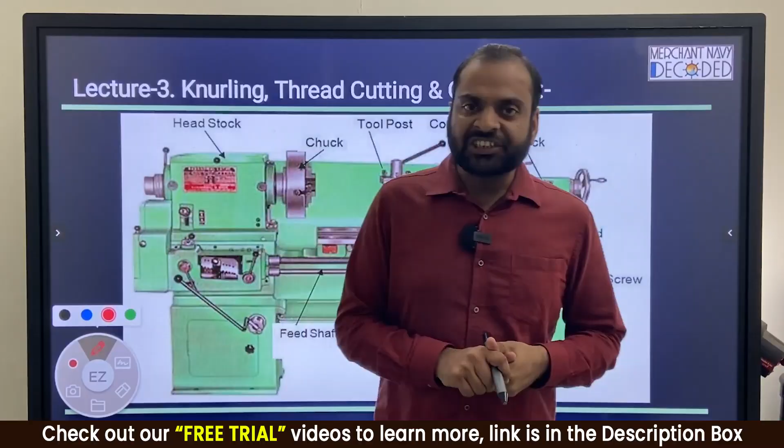Hello GP rating aspirants, welcome back to the next lecture. In this lecture we will discuss different operations like knurling operations, thread cutting operations and grooving operations.

I already taught you about this lathe machine. There are two movements of this tool post. First movement is longitudinal movement, that is parallel to the lathe, and second movement is cross movement with the help of this cross slide. First movement is longitudinal movement and second movement is cross movement. Clear? And this is your chuck.

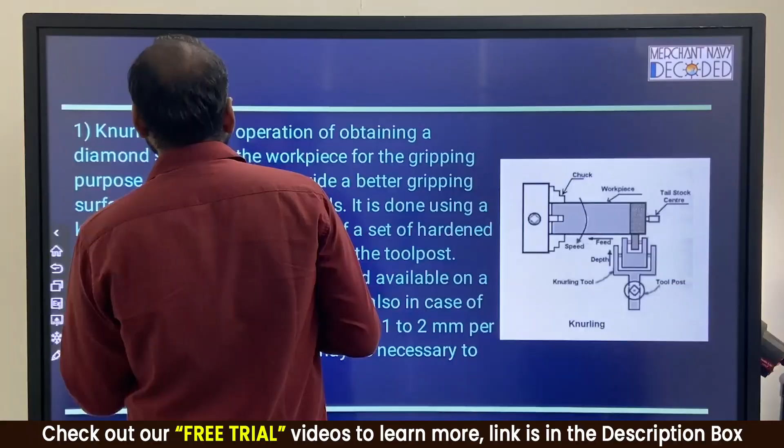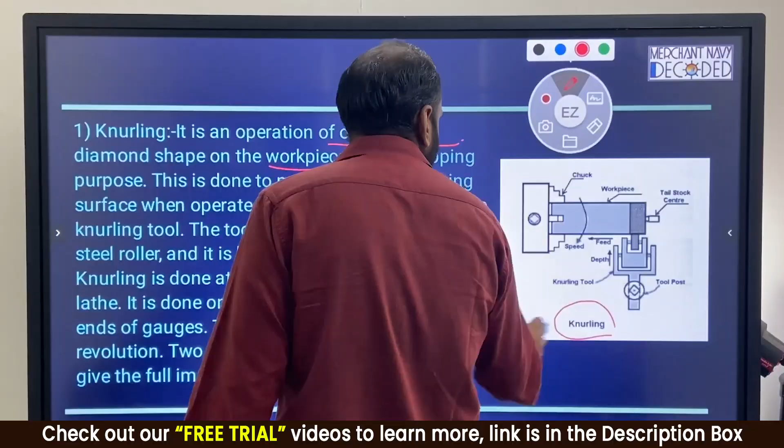Next, what is knurling operation? Knurling is an operation of obtaining a diamond shape on the workpiece. So this operation is nothing but knurling for the gripping purpose. This is done to provide a better gripping.

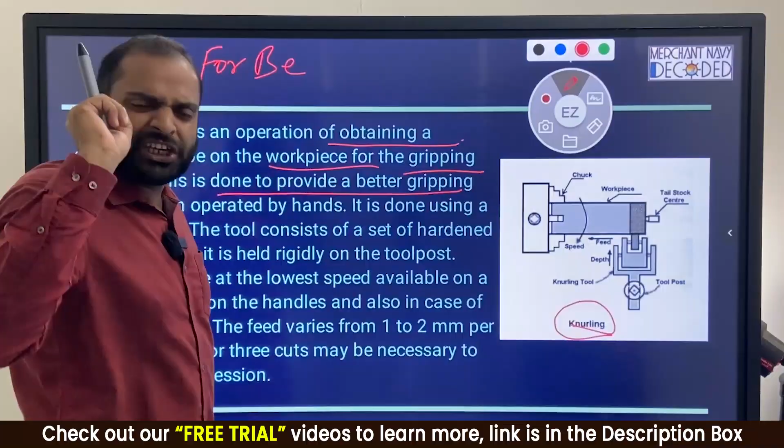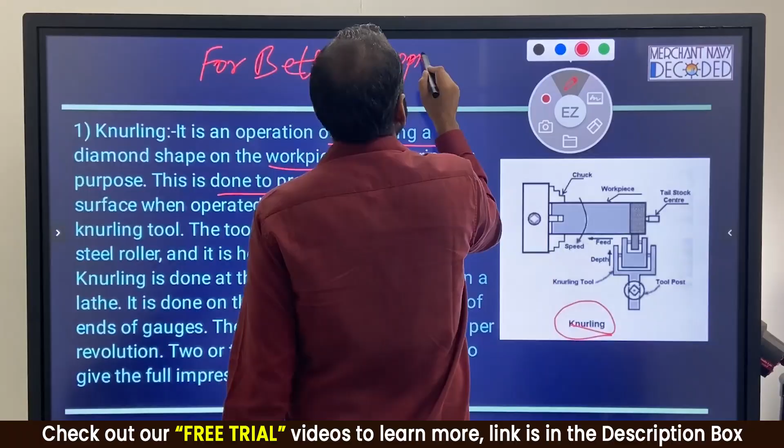This is an important MCQ question. For better gripping, please write it down, each and every point. The exam will definitely ask: for better gripping, which process is followed? Knurling process.

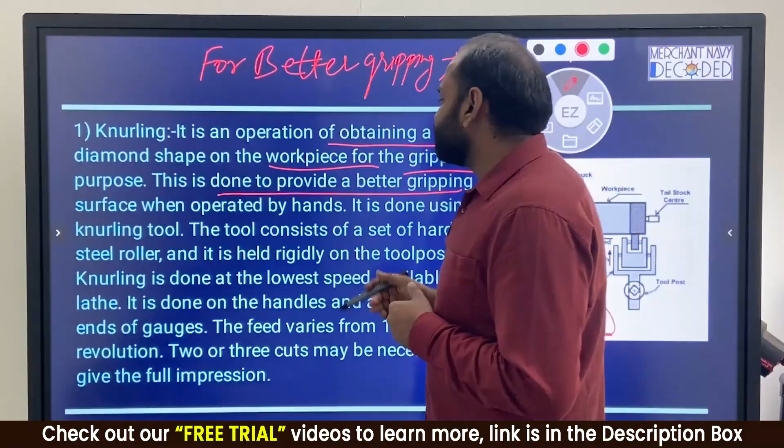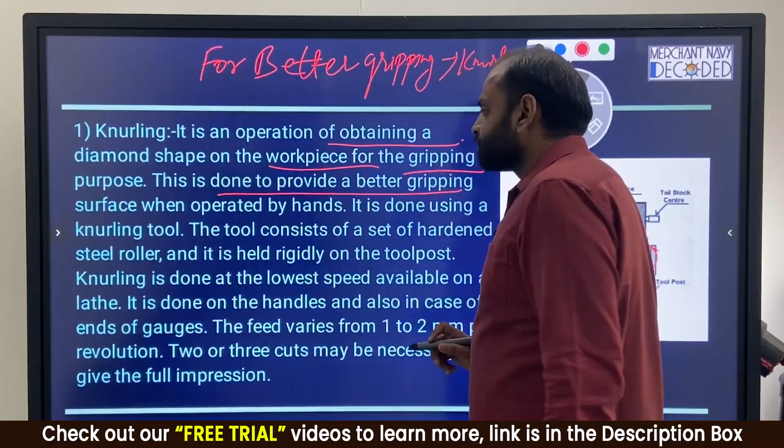So it is an operation of obtaining a diamond shape on the workpiece for the gripping purpose. This is done to provide a better gripping surface when operated by hands. It is done using a knurling tool. This is a knurling tool, a special tool.

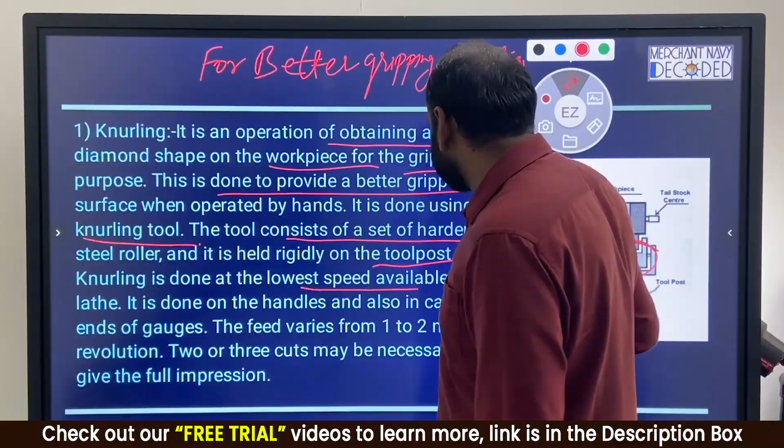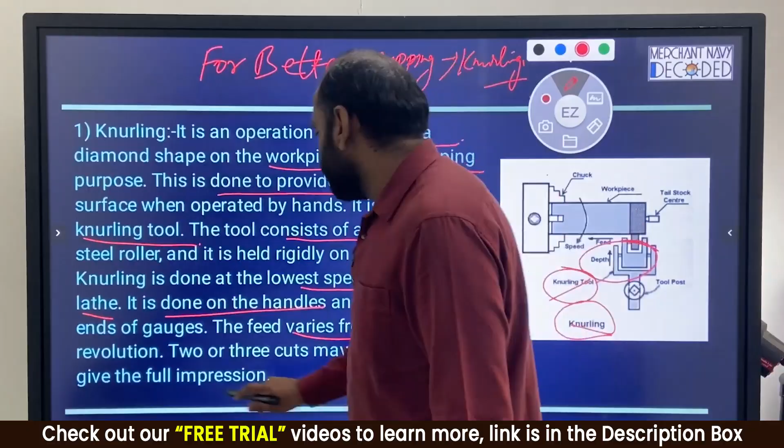The tool consists of a set of hardened steel rollers and it is held rigidly on the tool post. Knurling is done at the lowest speed available on a lathe. It is done on the handles and also in case of the ends of gauges. The feed varies from 1 to 2 mm per revolution. 2 or 3 cuts may be necessary to give the full impression.

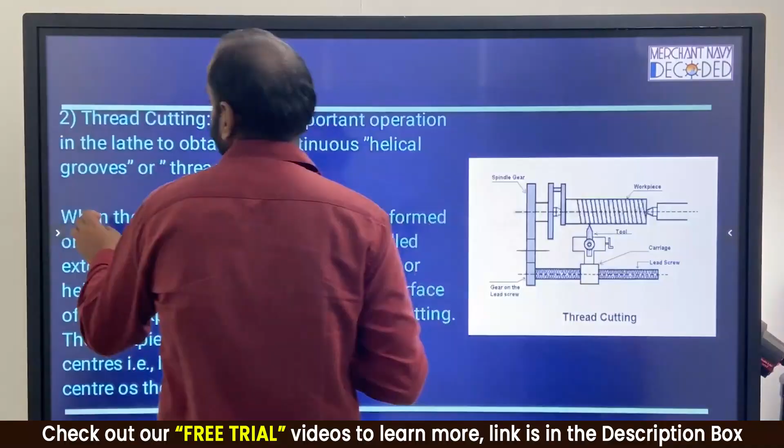So this is all about the knurling operation. Please remember the image well. Now, thread cutting - what is thread cutting?

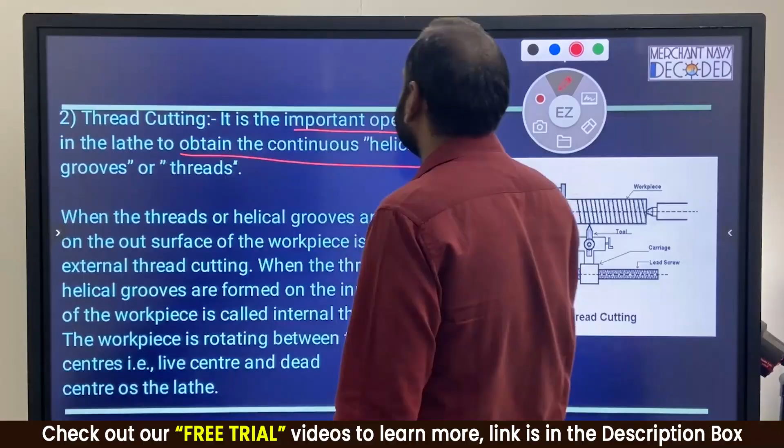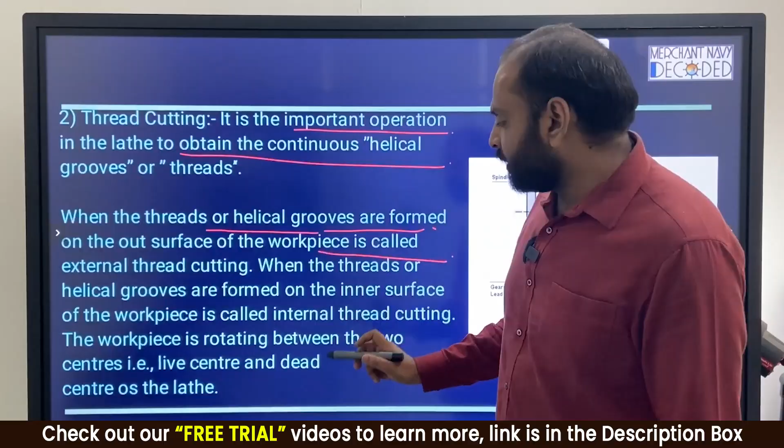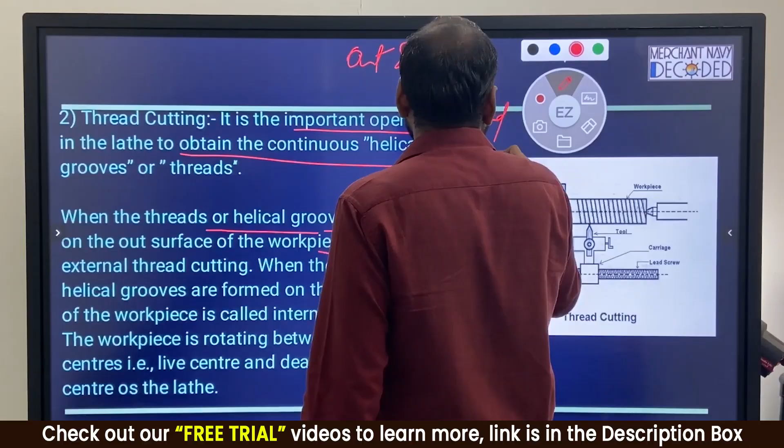This image refers to thread cutting. It is an important operation on lathe to obtain continuous helical grooves or threads. When the threads or helical grooves are formed on the outer surface of the workpiece, it's called external thread cutting. This is the outer surface.

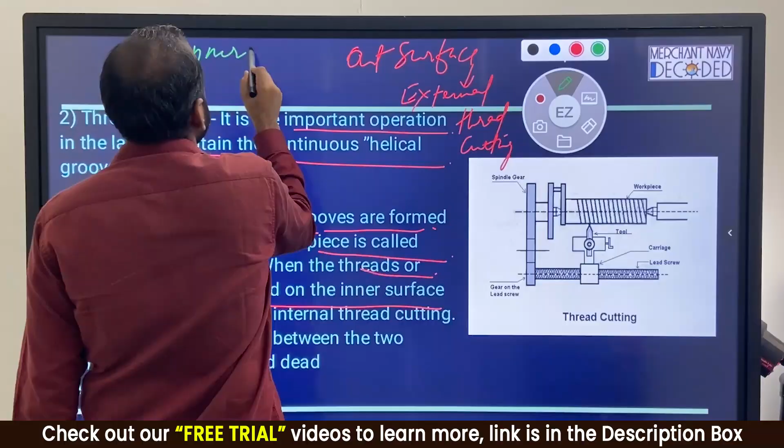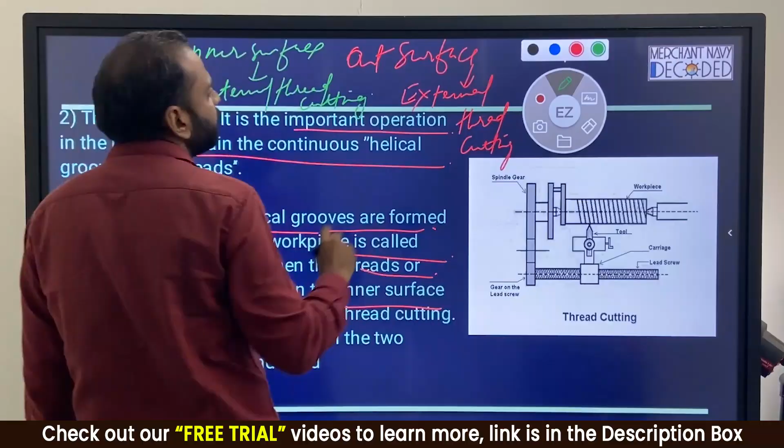When the threads or helical grooves are formed on the inner surface, it's called internal thread cutting. So the first one is external thread cutting and the second one is internal thread cutting. This type of operation is possible through thread cutting operations.

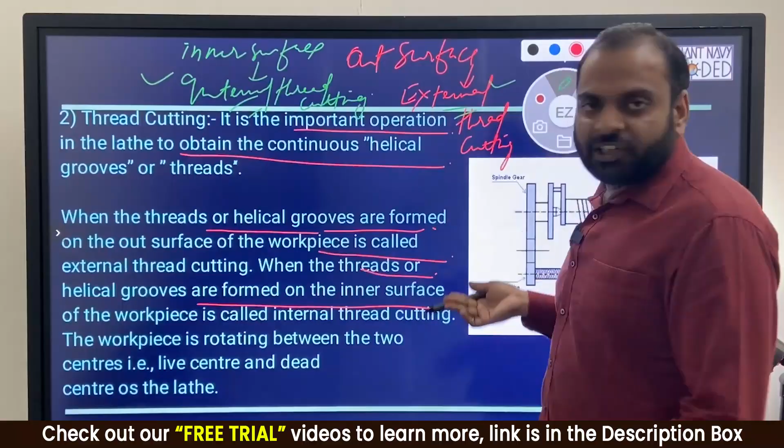The workpiece is rotating between the two centers, that is the live center and dead center. I already taught you what is the live center, which is rotating in nature, and the dead center which is in the tailstock. So this is all about thread cutting.

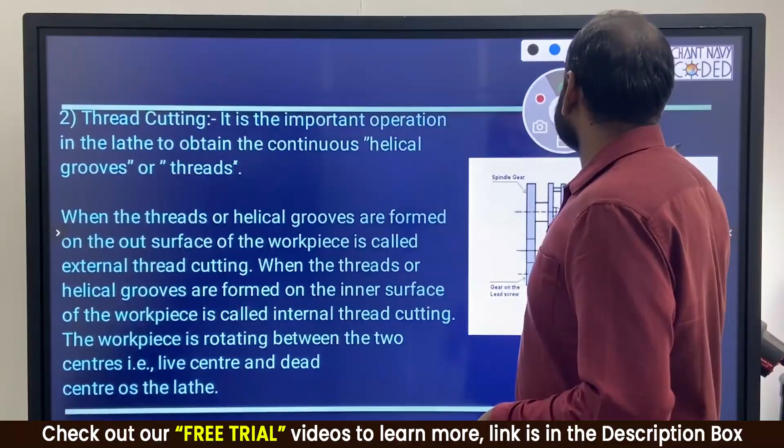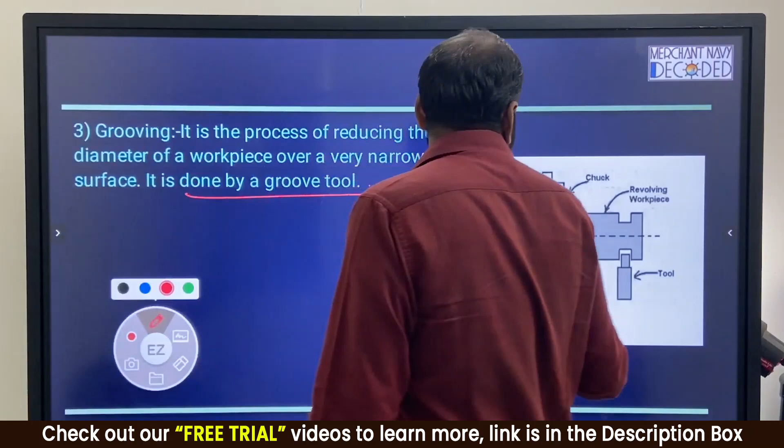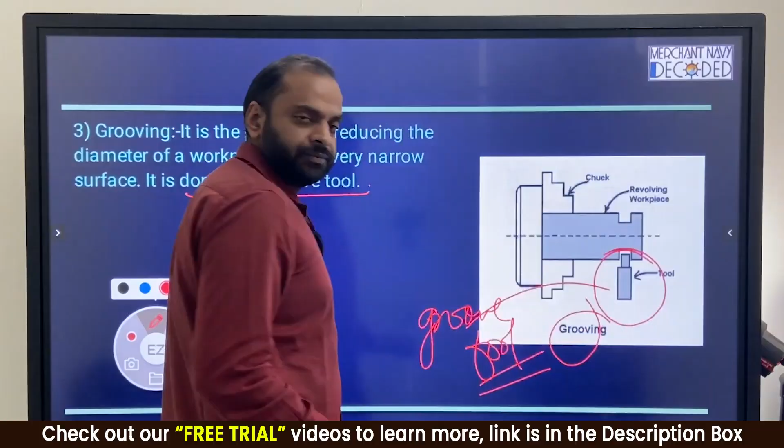Now what is grooving? It is the process of reducing the diameter of the workpiece over a very narrow surface. It is done by a groove tool. So this is a groove, and this is the groove tool. This operation is nothing but the grooving operation.

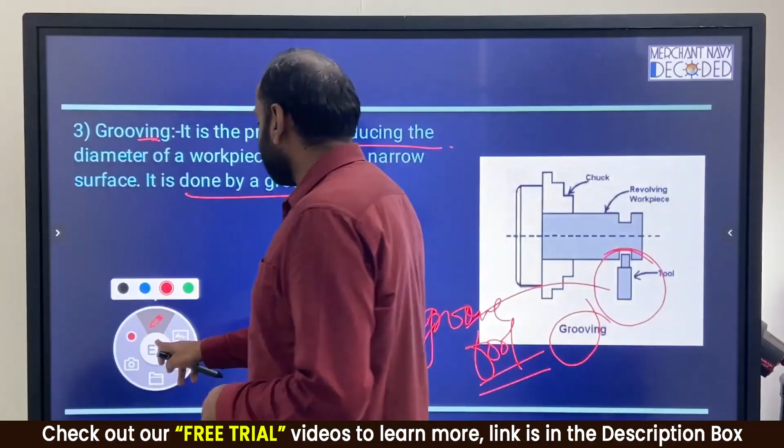It is the process of reducing the diameter of the workpiece over a very narrow surface, done by a groove tool. So this is all about the different operations. In the next lecture we are going to discuss forming operations. Stay tuned for further lectures. Thank you.